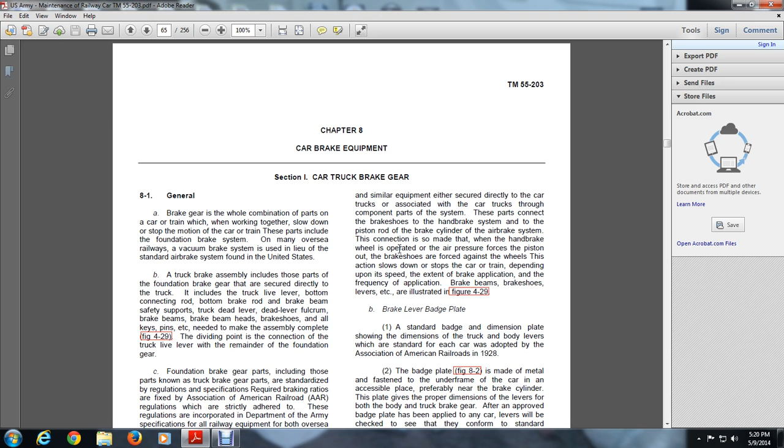The dividing point of the connection is the truck live lever; the remainder is the foundation brake gear. C. The foundation brake gear includes those brake gear parts and standardized regulation specifications required in braking ratios as fixed in Association of American Railroads regulations, which are strictly adhered to. These regulations are incorporated in the Department of the Army specifications for all railway equipment for overseas or domestic service.

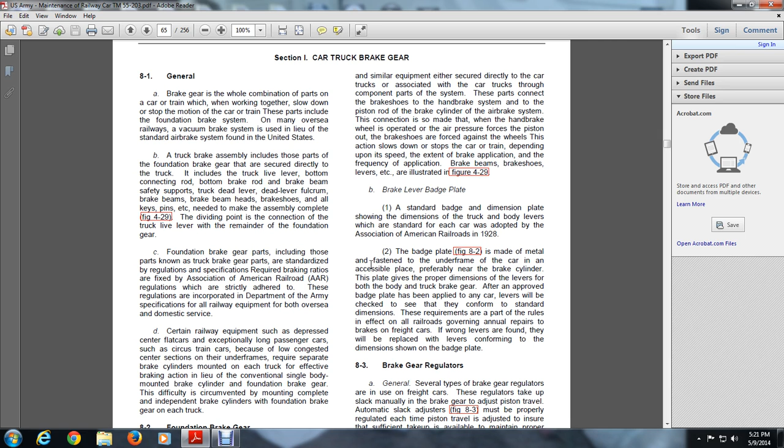D. In certain railway equipment, such as depressed center flat cars and exceptionally long passenger cars such as circus train cars, because of the low congested center sections, they require separate brake cylinders mounted on each truck. The difficulty of conventional single body mounted brake cylinders and foundation brake gear is circumvented by mounting independent brake cylinders and foundation brake gear on each of the trucks.

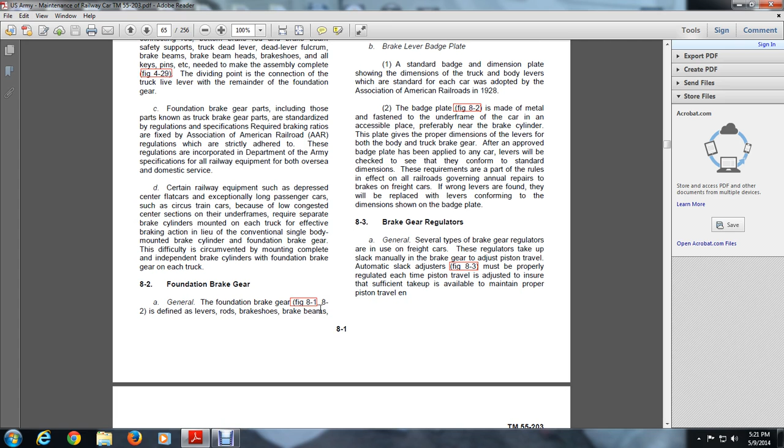8.2 The foundation brake gear. A. General. The foundation brake gear, Figures 8.1 and 8.2, is defined as levers, rods, brake shoes, brake beams and similar equipment, secured either directly to the car or to the car trucks. These parts connect the brake shoes and handbrake systems to the piston rods and brake cylinders of the air brake system, and this connection is made so the handbrake can be operated.

The air pressure forces the piston out, and the brake shoes are forced against the wheels, with the action slowing down or stopping the car or the train, depending on its speed and the extent of the brake application. The brake beams, the brake shoes, etc. are illustrated in figure 4-29.

B. The brake lever badge plate. A standard badge and dimension plate showing the dimensions of the truck and body levers, which are standard for each car, was adopted by the Association of American Railroads in 1928. The badge plate in Figure 8.2 is made of metal and fastened under the frame of the car in an accessible place, preferably near the brake cylinder. This plate gives the proper dimensions of the body and the truck brake levers.

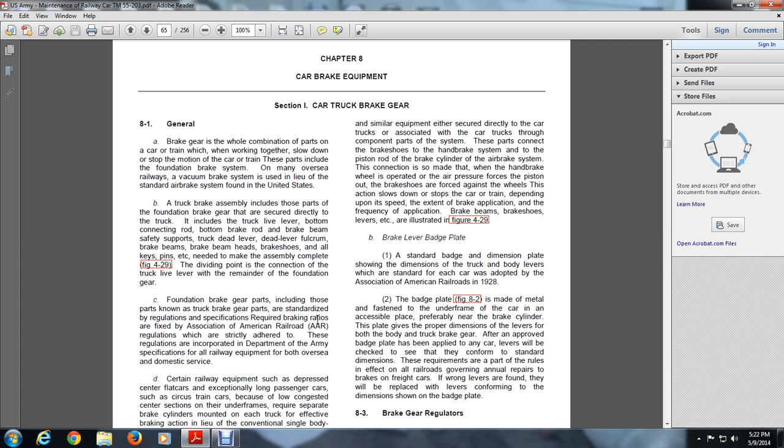After the badge plate has been applied to any car, levers will be checked to see that they conform to the standard dimension requirements, as part of the rules in effect governing annual repairs to brakes on freight cars. If wrong levers are found, they will be replaced with levers conforming to the dimensions shown on the badge plate.

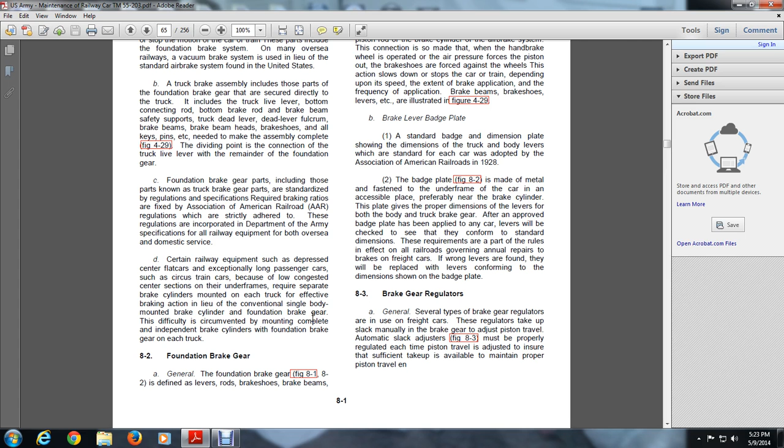8.3 The brake gear regulators. Generally, several types of brake gear regulators are in use. The regulators take up slack in the brake gear to adjust the piston travel. Automatic slack adjusters, Figure 8.3, must be properly regulated each time the piston is adjusted to ensure sufficient take-up is available to maintain the piston travel in service, as described in paragraphs 16.7 and 8.19. Three of these regulators are described below. But Figure 8.1 is the foundation brake diagram.

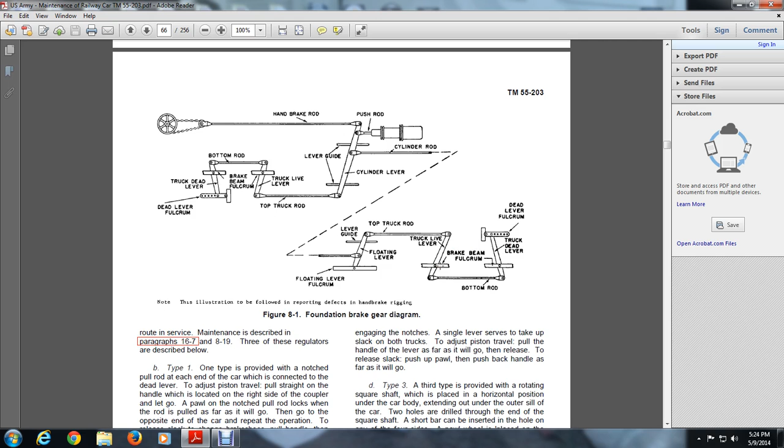Type 1. One type is provided by the notch pull rod at each end of the car and is connected to the dead lever. To adjust the piston travel, pull straight on the handle, which is located on the right side of the coupler, and let go. The notched pull rod locks when the rod is pulled as far as it will go. Then go down to the opposite end of the car.

Repeat the operation. To release the slack to change the brake shoes, pull the handle, and then give it 1/8 of a turn to the right, and then push the bolt back all the way, and this gives the maximum slack of the brake.

Type 2, another type of provided rigging lever, is extended in the horizontal position to a point under the outer ledge of the car near the center. On some applications of the hopper car, it is located in one end, and the lever actuates the notched square bar of the pawl underneath the bar. Engaging the notches. A single lever serves to take up the slack of both trucks.

To adjust the piston travel, pull the handle and lever as far as it will go, and then to release the slack, push up the pawl, and then push back the handle as far as it will go.

Type 3, the third type is provided with a rotating square shaft placed in a horizontal position under the car body, extending underneath the outer sill of the car, and 2 holes are drilled through the end of the square shaft, so the short bar can be inserted in the hole in any of the 4 sides. The pawl wheel is placed on the shaft in the direction to turn the shaft and take up the slack, indicated by an arrow on the housing enclosing the pawl wheel.

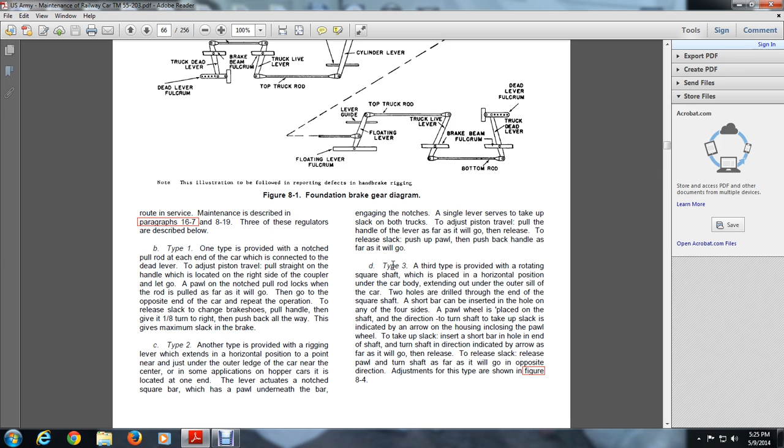When taking up the slack, insert the short bar in the hole in the shaft and turn the shaft in the direction indicated by the arrow as far as it will go. To release the slack, release the pawl, and turn the shaft as far as it will go in the opposite direction. Adjusting this type is shown in figure 8.4.

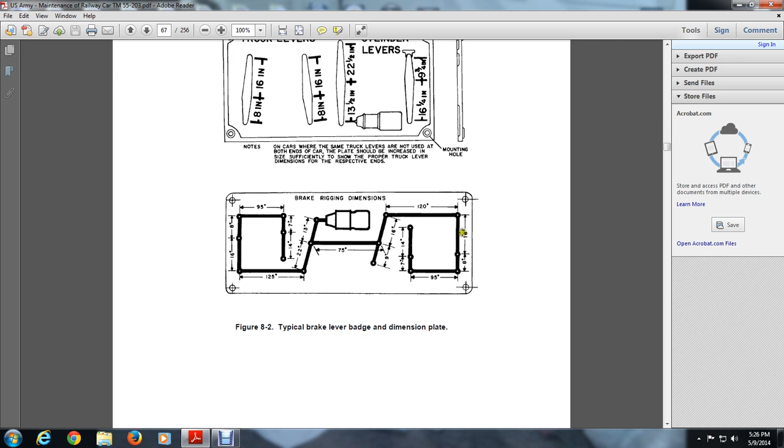14 inches, 7 inches, 95 inches, 8 inches by 16 inches, 125 inches, 22 inches, 13 inches, 75 inches, 9 inches, 16 inches, 120, 16 to 8 inches to 95 to 7 to 14. This is an important chart. It's 8.3, the brake regulator automatic type. The ABCs of brake rigging and adjustment for the model 1480 brake regulator.

Here on the left side, what to do if. The piston travel is too long, C, B, C2. Piston travel is too short, C, B, and C2. Brake shoes need replacing, C, A. Dimension X is incorrect, C1 and B3. Brakes cannot be hooked up because of insufficient shoe clearance, C3. Check out section C3.

If the regulator will not take up, go to section C2. If the regulator will not let out, go to section C2. Unit has to be replaced, C4. 2 inch brake shoes used in place of the original 1.5 inch, A4.

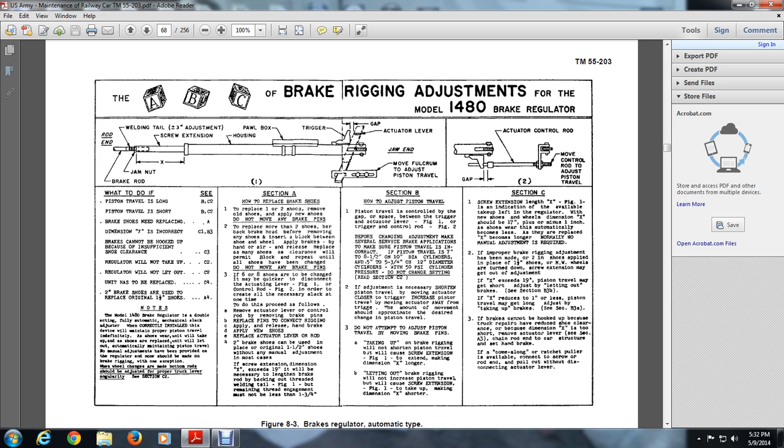Here you see the length reference, A. Note the welding tail and the jam nut, the screw extension, the housing, the pawl box, the trigger, the fulcrum bracket, and the actuator lever. The instruction plate placed on the car, which has these typical brake adjustments, contains the instructions within this illustration.

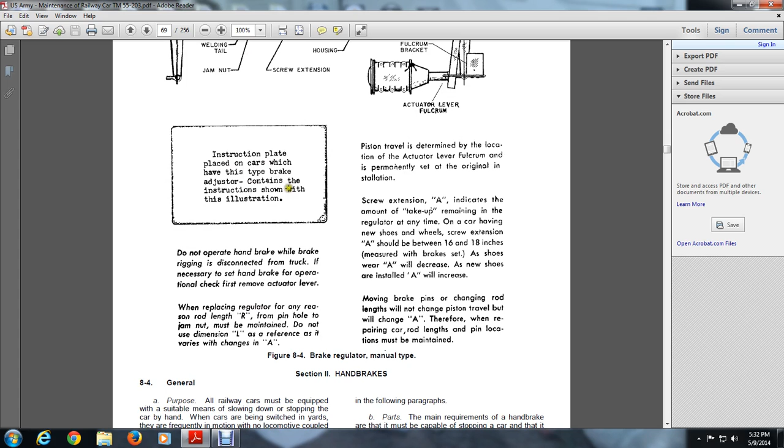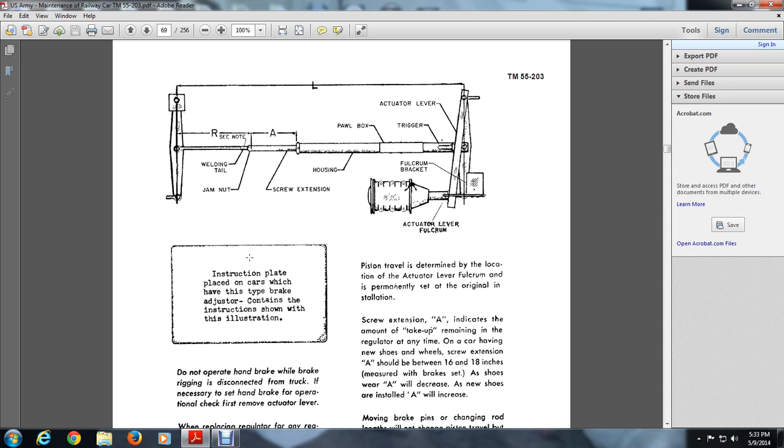Piston travel is determined by the location of the actuator lever fulcrum, and is permanently set at original installation. The screw extension A indicates the amount of take-up remaining in the regulator at any time, on a car having new shoes or wheels; A should be between 16 and 18 inches measured at the brake set. As shoes wear, A will decrease; with new shoes installed, it will increase.

Moving a brake pin or changing the rod length will not change piston travel, but will also change A. Therefore, when repairing the car, rod lengths and pin locations must be maintained.

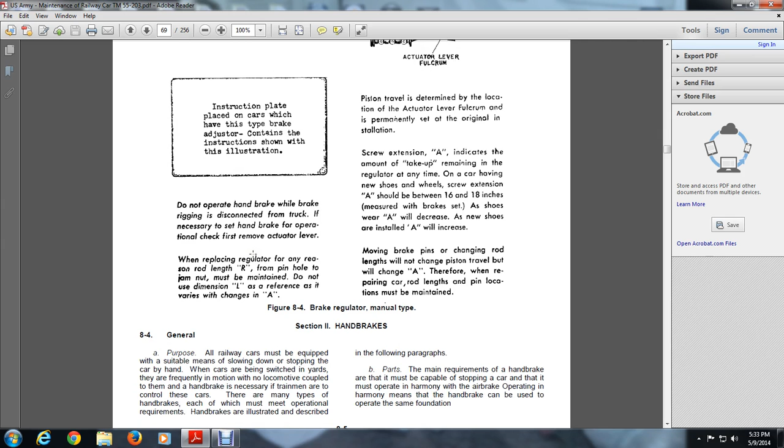That is figure 8.4, brake regulator manual type.

Section 2: handbrakes.